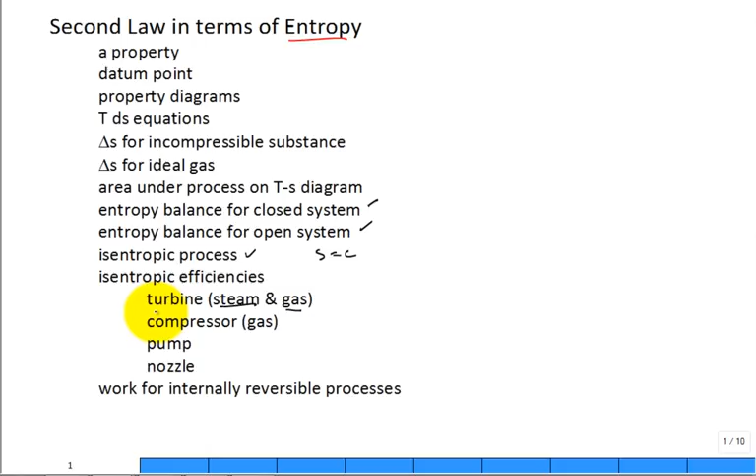Now we need to talk about first law analysis for an open system describing a steam turbine and basically a gas turbine. When we talk about turbines, they're devices that have a purpose, we want them to do something. Hence we have a measure of their efficiency, how well they work. And then we'll talk about gas compressors as well.

So let's jump into it and take a look at a problem. Steam enters a well-insulated turbine, maybe you put the turbine like this, and it's well insulated, so what is Q? Zero. The rest of the problem, you read it: it enters at state 1 where pressure and temperature are given, and it exits at state 2 where the pressure is given, and the purpose is to produce some work per unit mass of the steam that goes through.

So we would calculate the maximum possible work produced in the turbine, in units of kilojoules per kilogram.

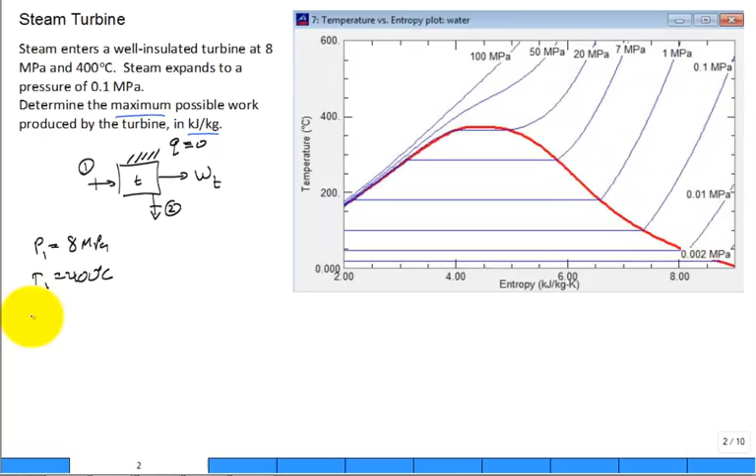All right, well let's list all the information given. Pressure 1 is 8 megapascal, temperature 1 is 400 degrees C. We could list other properties, but the properties of interest are going to be H1 and S1. And then think about state 2: we're going to have the pressure at 2, the temperature at 2, the enthalpy at 2, the entropy at 2. That's a pretty good start on our list of properties.

All right, so if you do a first law analysis around this turbine, first law really is a statement of the conservation of energy, and it's an energy balance. You have negligible heat transfer, no change in kinetic energy of the flow, no change in potential energy. There's no information given, so you just assume—if it's not given, we're going to assume it's negligible.

And you've done a first law analysis before, and what you find is that the work developed by the turbine is the difference in the enthalpy of the flowing fluid. It comes in with high energy content, high enthalpy, and goes out with low energy content, lower H2. Hence the energy in the steam—some of it was converted into shaft power, shaft work. How much of it? The difference between the enthalpies.

So then you say, well, I have to go and do the second law. Maybe the second law of thermodynamics, an entropy balance for that system, for the same control volume, gives you something like this with a little bit of work. It gives you that the exit entropy is equal to the inlet entropy plus sigma dot over m dot. There's no heat transfer, so there's no entropy transfer with the heat. It's operating at steady state, and when you manipulate it, there you go.

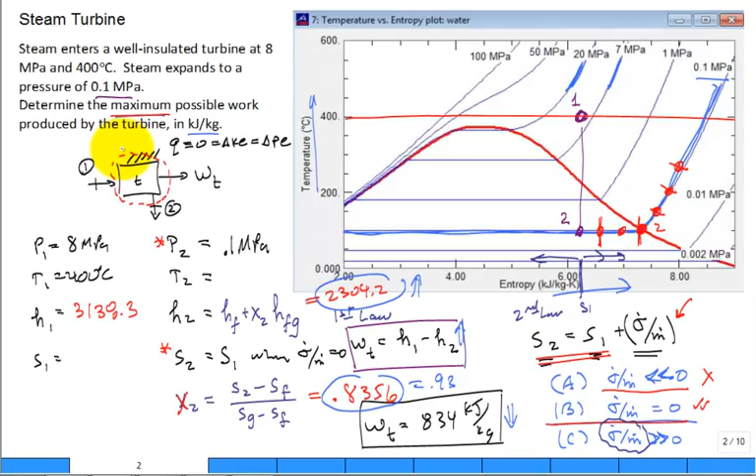Somebody says well-insulated steam turbine at 8 megapascal, 400 degrees C. It's going to be right around here for the inlet state 1. It exits at 0.1 megapascal. Yep, that's that same problem, 0.1 megapascal. Oh, but it's exiting at 120 degrees C.

Where is 120 degrees C? A little bit above 100 degrees C. It's right around here. That's where it actually physically exits, slightly superheated steam. Because TSAT at the 0.1 megapascal is 100 degrees C, right? Right at 100 degrees C. So if it comes out at 120, it's slightly superheated.

Now determine the work produced by the turbine. Well, you have the same equation. The work produced by the turbine is H1 minus H2. That didn't change. Make a list of all our temperature 1, pressure 1, enthalpy 1, entropy 1. Then come over here: pressure 2, temperature 2, enthalpy 2, entropy 2.

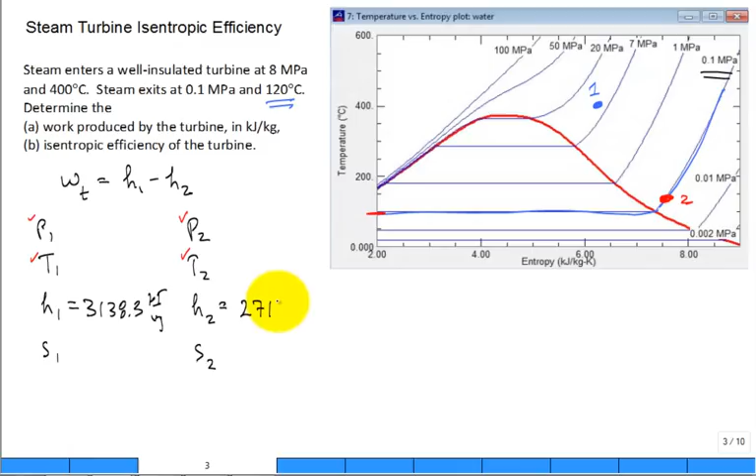There's no need for quality of 2 for this case. It's coming out superheated, true? So because they gave us the pressure and the temperature on both inlet and outlet, there really isn't much to do. We can just go and make a calculation. That number didn't change, 3138.3 kilojoules per kilogram. And this number comes just from going pressure 2 and temperature 2, it's slightly superheated. It's 2716.6 kilojoules per kilogram.

Hence, the work that the turbine produces is 422 kilojoules per kilogram or thereabouts. What was it before if it was isentropic expansion? When it came down here, the work produced was 834. Now it's only 422. It's not as good.

Engineers can measure the performance, or they give metrics for the performance. They report an efficiency of that turbine. What type of efficiency? Well, what's the benchmark that you're comparing against? It's the isentropic efficiency. If you would have expanded isentropically, how much work would you have gotten out? Well, the work turbine, if it would have been isentropic expansion, we calculated to be 834 kilojoules per kilogram. This is the actual. I think we need to go to the drawing board and help improve the design of the steam turbine. And there's a lot of mechanical engineers working out improving designs of equipment like this.

So, what would be the isentropic efficiency of the turbine? The efficiency of the turbine would be defined as what you wanted to get out. You wanted to get it as high as possible, but this is what you actually were able to get compared to the maximum possible out. And so it's 422 divided by 834, and the isentropic efficiency is equal to 51%. Why do they have the word isentropic in there?

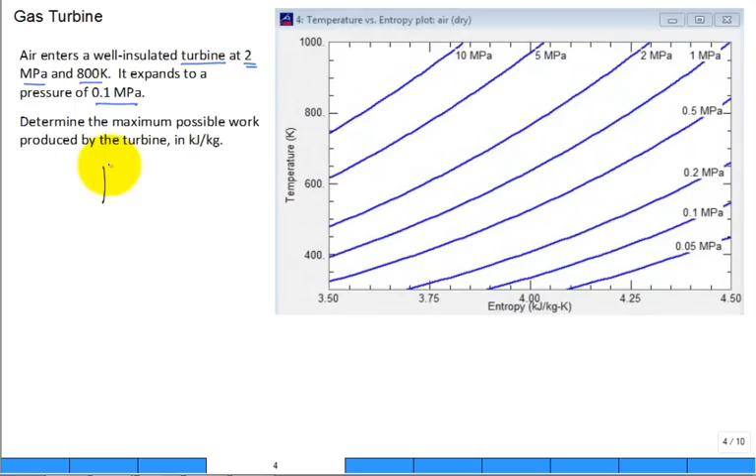It's the same thing. I have a turbine, inlet fluid stream state 1, outlet fluid stream state 2. The goal is to produce as much work as possible. It's well insulated, so what's lowercase q? There's no information about changes in kinetic and potential energy, so it's assumed to be 0. We go ahead and write the first law.

Wherever you want to write it, I'll write it down here. The first law, you would have that the work produced by the turbine, even though it's not a steam turbine, it's a gas turbine, you get the same equation: it's H1 minus H2. You write the second law, same equation, same type of behavior.

The exit entropy is equal to the inlet entropy plus how much is produced due to irreversibilities, entropy production due to irreversibilities.

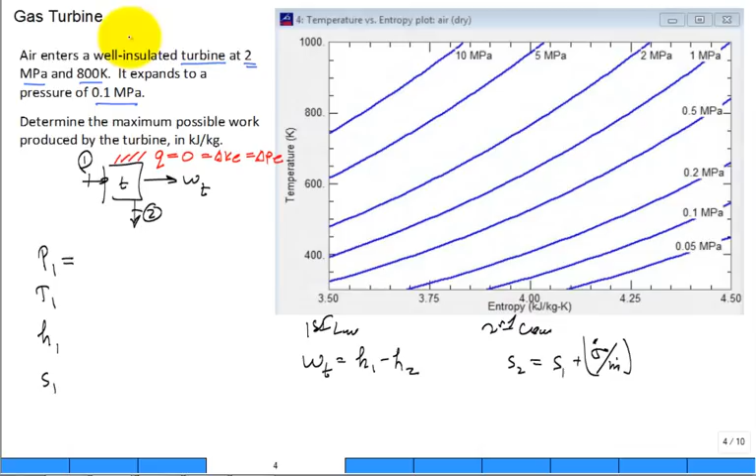So if I want to find H2, what you typically do is think about pressure 1, temperature 1, enthalpy 1, entropy 1, etc. But this is all for an ideal gas, air behaving as an ideal gas. When you have an ideal gas, a couple equations come to mind.

What are some of these equations for an ideal gas? PV is equal to RT. Sometimes or all the time? All the time. During an isothermal process? Yes. During a constant pressure process? Yes. During an isentropic process? Yes, all the time. If air is always behaving as an ideal gas, P times V is equal to RT at all times, at every state.

And then the next one is U is a function of temperature only, H is a function of temperature only, and if I'm really interested in getting S, it's a function of temperature and pressure, but often what we do is we're interested in calculating changes in S, and so the equation that you might remember is C sub P natural log of T2 over T1 minus R natural log of P2 over P1, something like that.

True? All right, so now it's not such an easy thing to say what's S1. I can say the change in S is equal to S naught at T2 minus S naught at T1 minus R natural log of P2 over P1. I might be able to say what's S naught at 1, but we really only have an equation, either variable specific heats or constant specific heats, for calculating entropy changes of an ideal gas. It's a little different than what we had for steam.

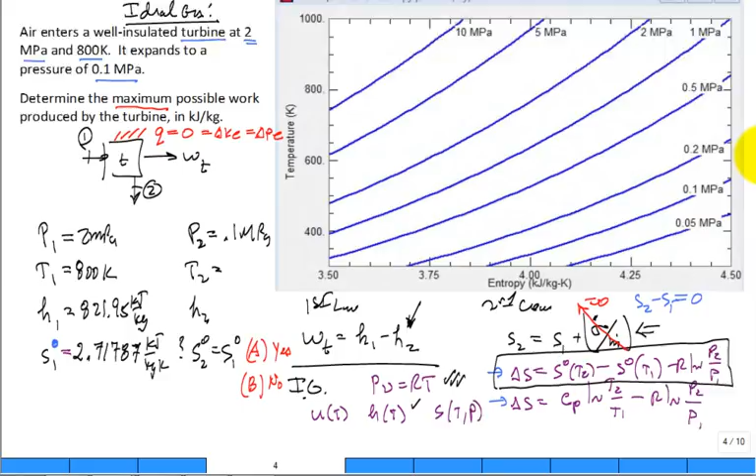It's isentropic expansion. Is that the same as saying, if I take this equation, I have S2 minus S1 equal to 0, but how do I calculate the change in entropy? Oh, it's S naught at T2 minus S naught at T1, minus R natural log of P2 over P1.

So what's equal to 0? It's everything on the right-hand side.

Let me ask this question. Is P2 equal to P1? It is not. P2 is not equal to P1. Here it is, 2 megapascal, 0.1 megapascal. It's high pressure to low pressure, going through a steam turbine, going through a gas turbine, high pressure to low pressure.

Let me ask you this: is the natural log of P2 over P1 equal to 0? It's not equal to 0.

Thank you for answering those, but I have a clicker question now. Is S2 naught equal to S1 naught? Answer A for yes, B for no. This time I'll only give you 30 seconds.

Polling has stopped. Can I rewrite this equation right here? Could I rewrite that equation as S naught at T2 is equal to S naught at T1 plus R natural log of P2 over P1? Could I rewrite that equation like that? Yes, we could.

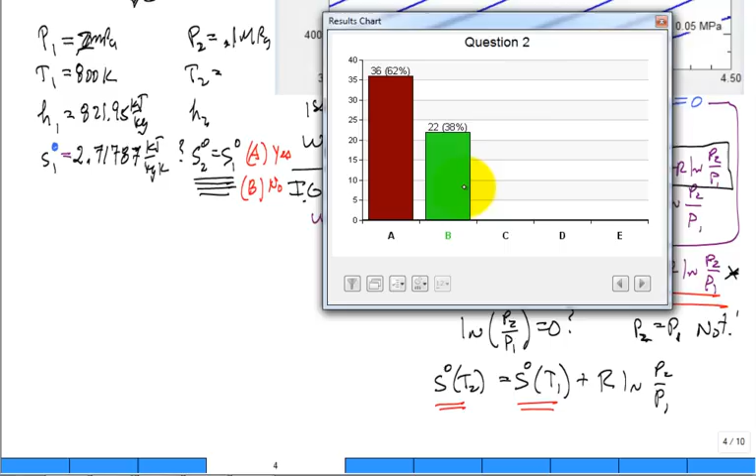So how do I find it? It's a multi-step process here, let me help you a little bit. What you do is say, no, no, no, I just can't willy-nilly do that. What I have to do is come down to this equation and put in 2.71787 plus R, 8.314 divided by 28.97 for air, multiplied by the natural log of the final pressure, 0.1 megapascal, over the inlet pressure, 2 megapascal.

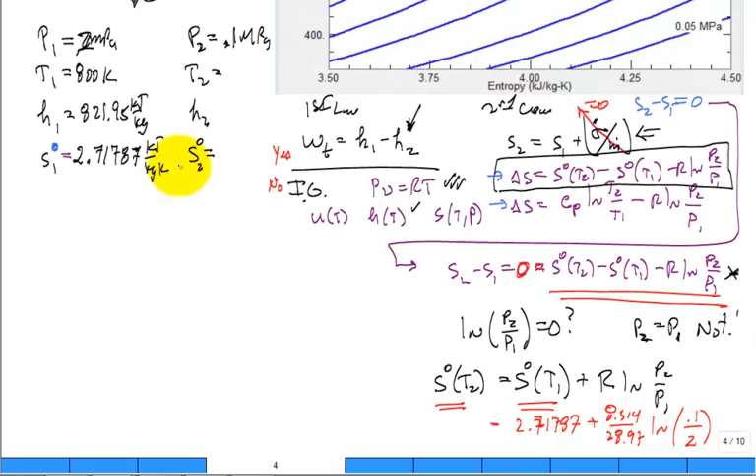And then I find that this S2 naught is equal to 1.85814.

I look in the air tables for where that occurs, and I do a little interpolation, and I find that H is equal to 350.87, and T is equal to 350.4. If I interpolate twice, I get the T as well as the H, but all I really needed was the H.

And so the work of the turbine, assuming isentropic expansion, is equal to 471 kilojoules per kilogram of the air. Make sense?

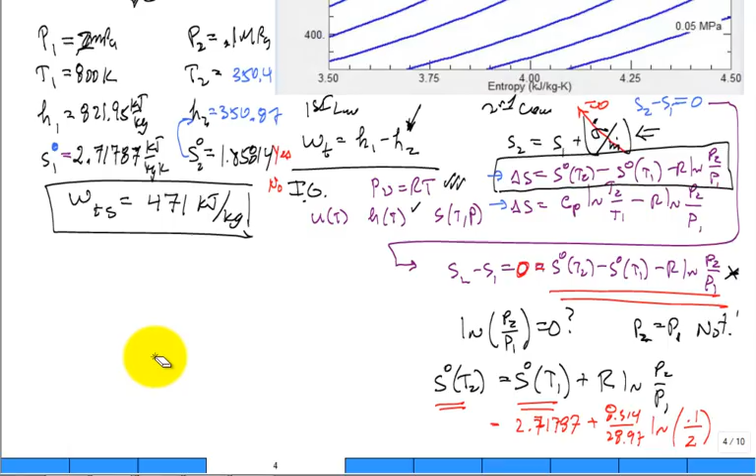All right, let me do this. I want to go back - I have this illustration taking up a large part of the screen I haven't talked about yet, have I? What is this diagram? A temperature entropy diagram. And where's my dome? There's no dome for air. Air behaves as an ideal gas. The dome is so far off, it's not even shown, it's way down in the corner off the chart.

So we're going to find the state where it's 800 Kelvin and 2 megapascal.

There is the initial state 1. What are the blue lines? Lines of constant pressure. Then we're going to expand down to a low pressure. The pressure is 0.1 megapascal. It's this line right here.

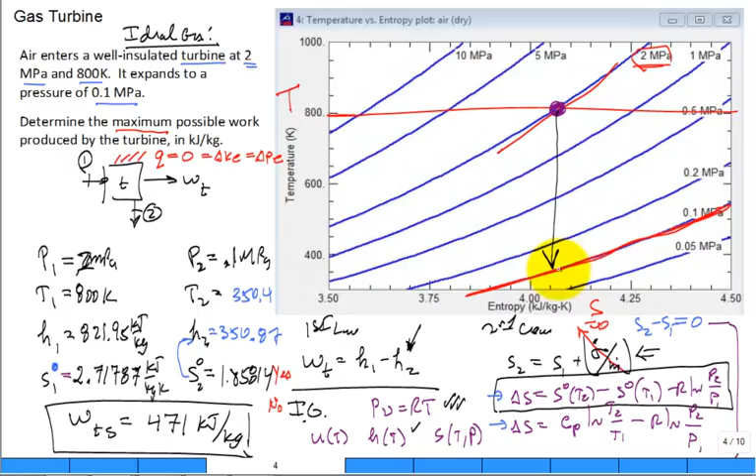True? We talked about the maximum work being isentropic expansion, constant S, down to the final state 2 from initial state 1. If it was not isentropic, but you had some irreversibilities, where would state 2 go? It would stay on the red line at 0.1 megapascal. Would it skip off a little bit going in this direction? It would, right?

What would the exit temperature do? It would march up a little bit. Hence, it has more enthalpy going out. That's what we wanted to convert. We wanted a large H1 minus H2. We wanted a low H2. We wanted a low T2 to get the maximum work out. So any irreversibilities is bad for performance.

Just to clarify, to get T2 and H2, you did interpolation. That's right. You want the details? No, it almost landed spot on. It's like 3.7% of the way between the value at 350 and the value at 360. So you could have almost ignored that interpolation and picked the value of 350, but I did the details.

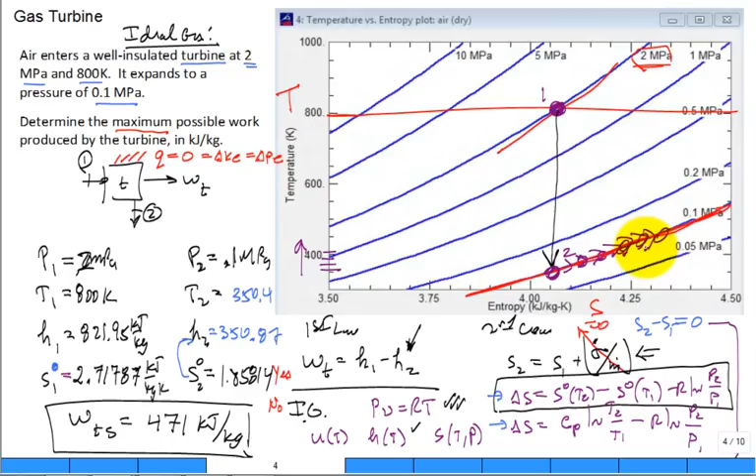All right, so guess what you do next? You talk about the isentropic efficiency. So what you do is say, okay, we know it starts at 800 Kelvin at 2 megapascal. That's where it starts, state 1. But now it's not going to go down to almost 350. It's going to go to 400 Kelvin and 0.1. There's exit state 2. Does that seem plausible that you could have it go like that?

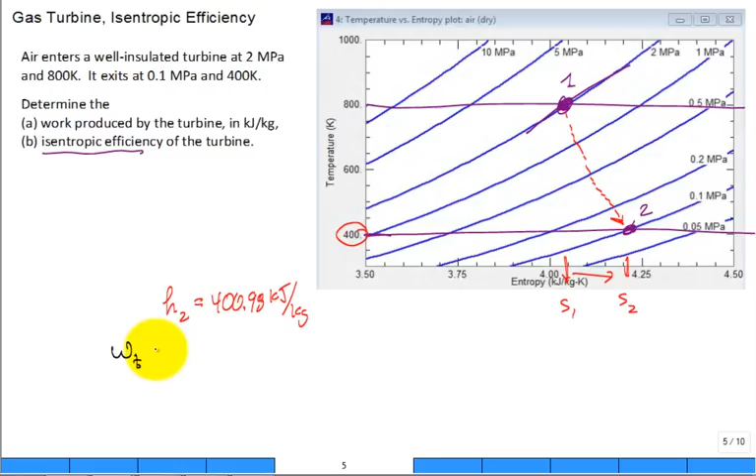Sure, because it's not going to violate the second law. S2 is greater than S1 due to irreversibilities. But because of the higher temperature, the exit enthalpy at state 2 goes up. The exit enthalpy at state 2 now is 400.98 kilojoules per kilogram. Hence, the actual work out of the turbine is only 421 kilojoules per kilogram.

The next part, what's the isentropic efficiency? Well, the efficiency of this gas turbine would be the actual work out of the turbine compared to the maximum, which would be assuming isentropic expansion, which you calculate to be 421 divided by 471. And the isentropic efficiency of this gas turbine is 89.4%.

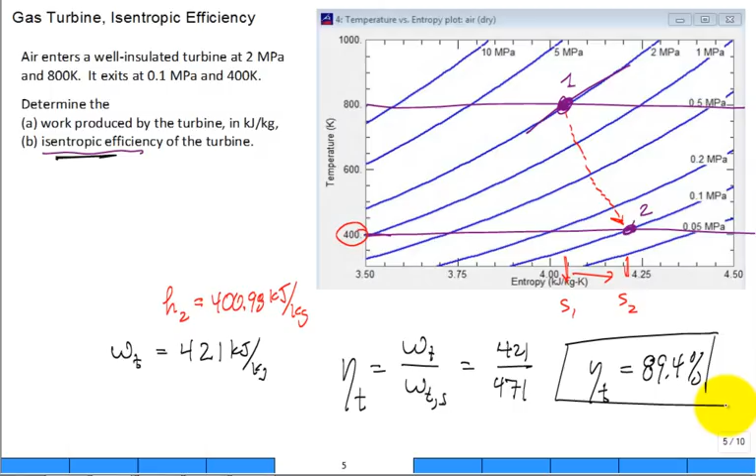So if you want the maximum work out of a steam turbine or a gas turbine, both of those turbines are well insulated, negligible changes in kinetic and potential energy, it's isentropic expansion of that steam, isentropic expansion of that gas.

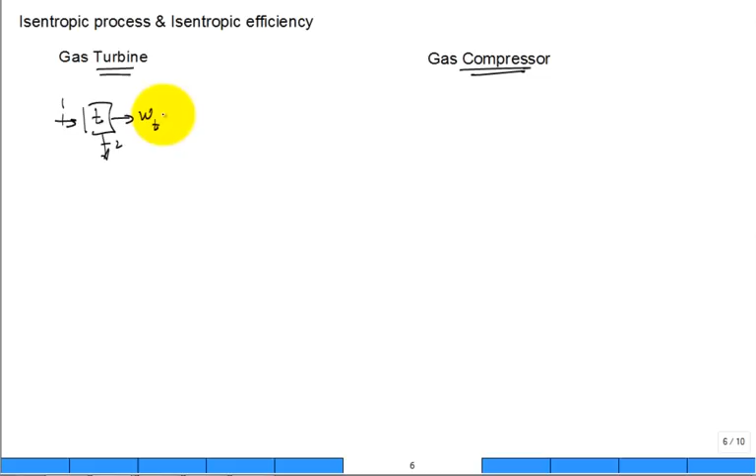Now I need to talk a little bit about compressors, but before we do that, let's summarize for the gas turbine. So you have a turbine, you have the inlet flow 1, exit flow 2. You're trying to convert as much of the work that's in the fluid into shaft work. So the work out is the change in the enthalpy. Again, it's well insulated and neglect changes in kinetic and potential energy.

We could put this on a property diagram, temperature entropy. Think about lines of different pressure, and you start at high pressure. This is a high pressure right there, that's a low pressure. And you expand from 1 to 2, and that will be called 2S.

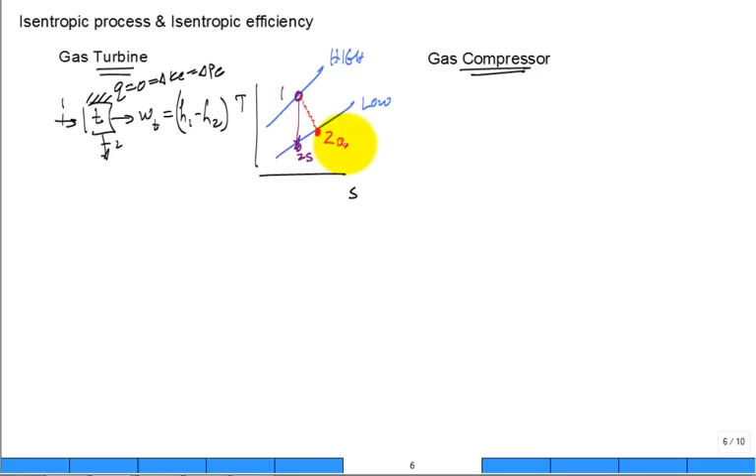It's isentropic expansion. If you actually have a real turbine, there'll be some irreversibilities. It'll still go to the low pressure, but that's state 2 actual. Sometimes I'll put an A there to say, hey, this is 2 actual versus 2S. 2S for isentropic, 2 actual for actual. And I don't think the book does it, so I think I'll try and leave it off for right now. But it's the actual expansion.

If you wanted to say, what is the isentropic efficiency of the turbine? The isentropic efficiency is the work that the turbine actually produces divided by the maximum work, which would be isentropic work out. True? So it would be something like H1 minus H2 divided by H1 minus H2S.

If you assume constant specific heats, you have C sub P times T1 minus T2 divided by C sub P times T1 minus T2S. The C sub P's cancel. Constant specific heats helps us look at the difference between this temperature T1 and the temperature T2S. That length of that line is the greatest. Then you have another length of the line from T1 down to T2 actual. And so the ratio of the lengths of those lines visually is the isentropic efficiency.

Now let's talk about a gas compressor. I tried to put this all on one slide. Comes in at 1, goes out at 2. We could show the work coming out of the compressor, but you're going to have to supply shaft work into the compressor, true? And what's the purpose of a compressor?